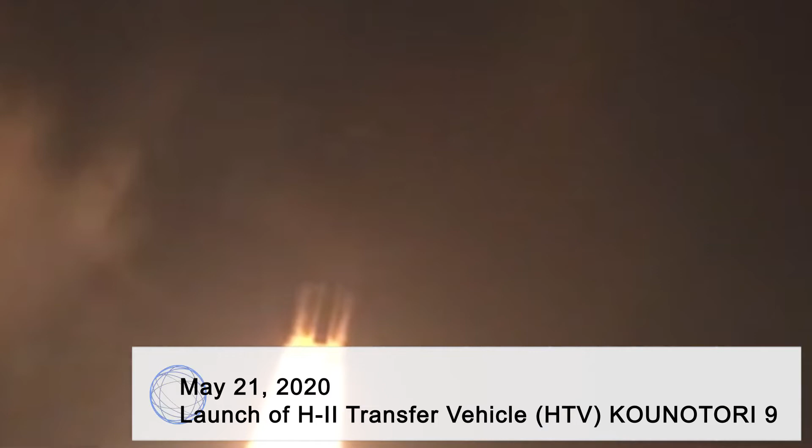On May 21, 2020, the SCEM was loaded onto the H-II transfer vehicle Kounotori 9 and transported to the International Space Station. Astronaut Soichi Noguchi installed SCEM in the Kibo Japanese experiment module.

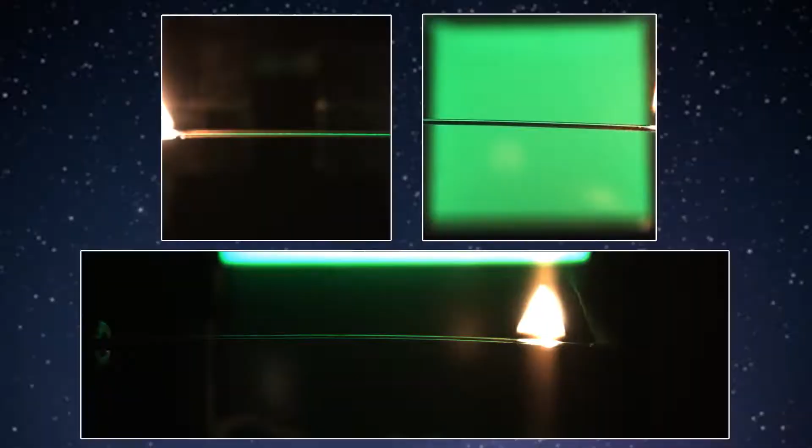With the SCEM, we are able not only to burn a sample material in space, but to use multiple cameras to observe how the flame spreads. Footage from these experiments will give us important data, such as the shape of the flame, how fast the fire spreads to consume sample materials, and how far heat is conducted ahead of the advancing flame.

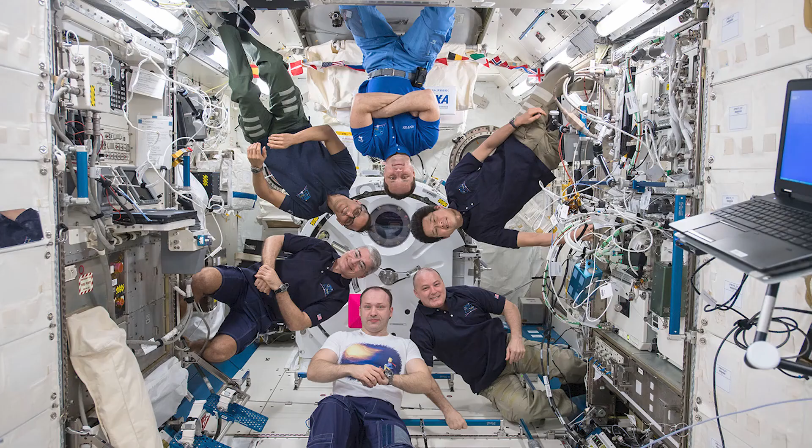The SCEM unit is mounted in the multi-purpose small payload rack, known as the MSPR, which is part of the Kibo experimental module. The larger space, which we call work volume, houses a combustion chamber for experiments, a camera system, a ventilation unit, and a power and communications control unit.

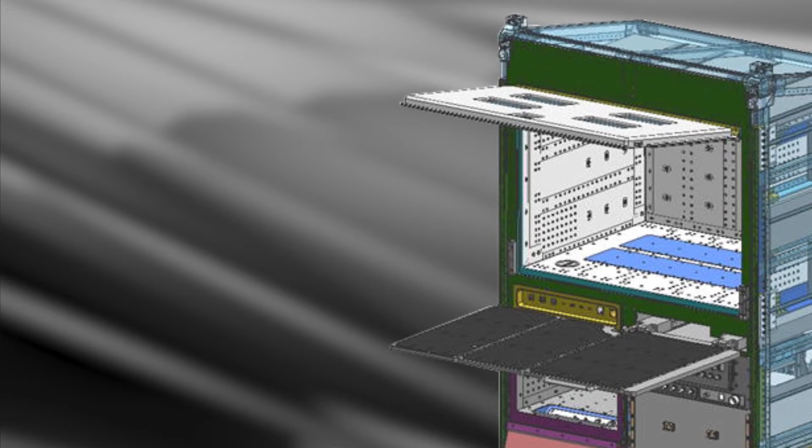In the small experiment area underneath, there is a gas canister filled with a mixture of oxygen and nitrogen, which is essential for combustion experiments.

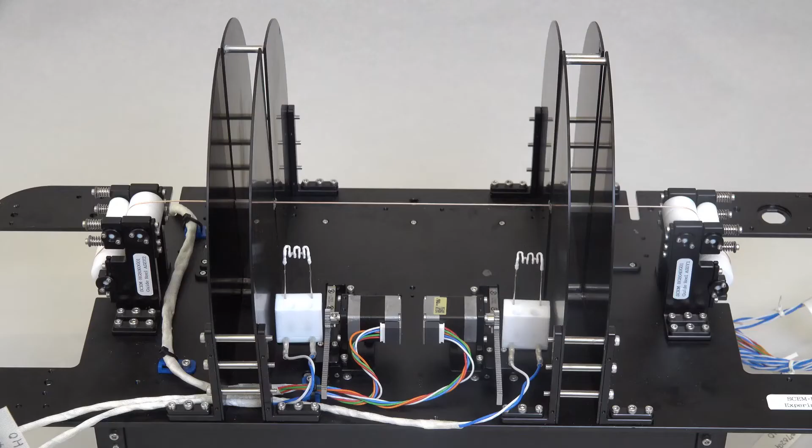There are two types of experiment inserts. The first holds electrical wire samples. The second holds flat samples.

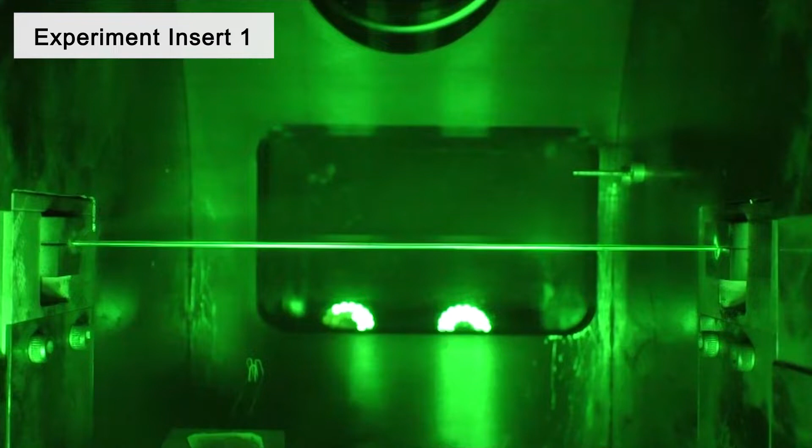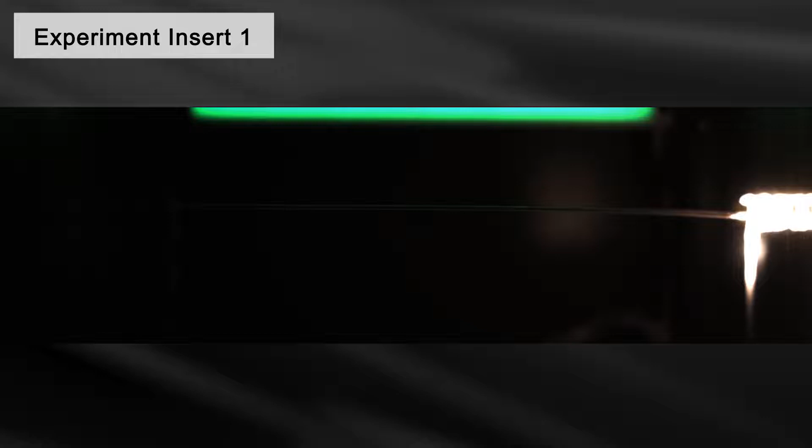Experiment Insert 1 has two types of ignition. One induces a strong electrical current in the wire core, achieving self-ignition. The other ignites the sample using an external heat source.

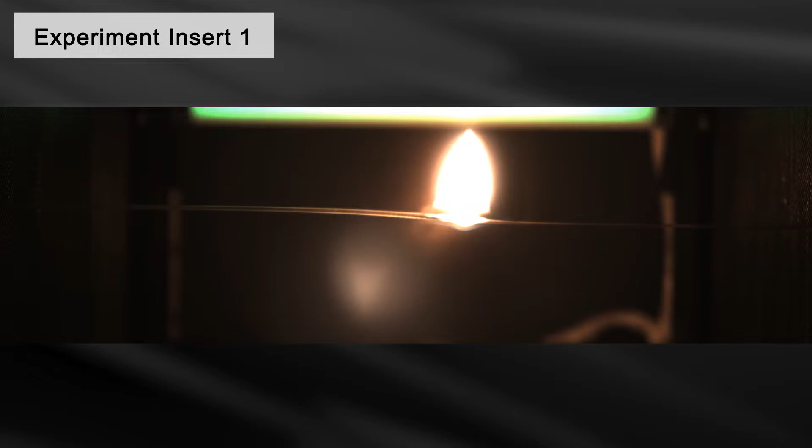This insert allows us to burn an electrical wire that feeds continuously from one reel to another. The unit can accommodate electrical wire samples that are 1.1 millimeters in diameter or even smaller, and up to 81 meters long. An experiment with an electrical wire cannot be recorded properly if the flame moves along the wire at a different speed than the wire is moving from one reel to the other.

In order to keep the fire at the center of the module, the speed of the flame is measured with a visible light camera, and the speed of the wire feed is adjusted accordingly.

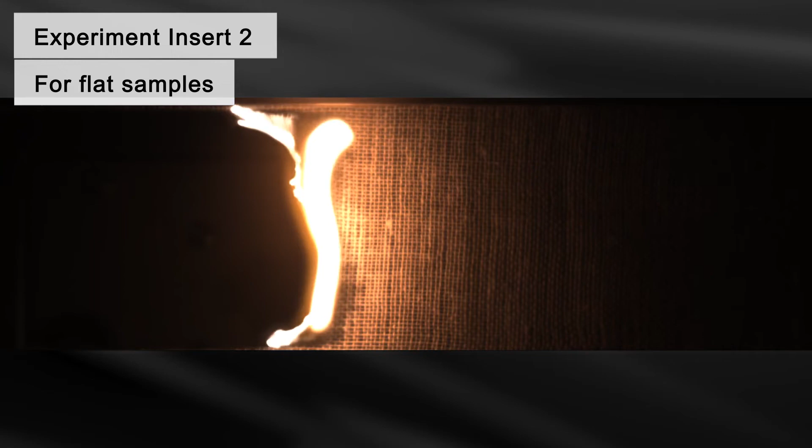Experiment Insert 2 is used for flat samples. Samples are stored in a special cartridge and can be loaded remotely without the help of the crew. When an experiment is finished, the sample is automatically placed in a retrieval cartridge.

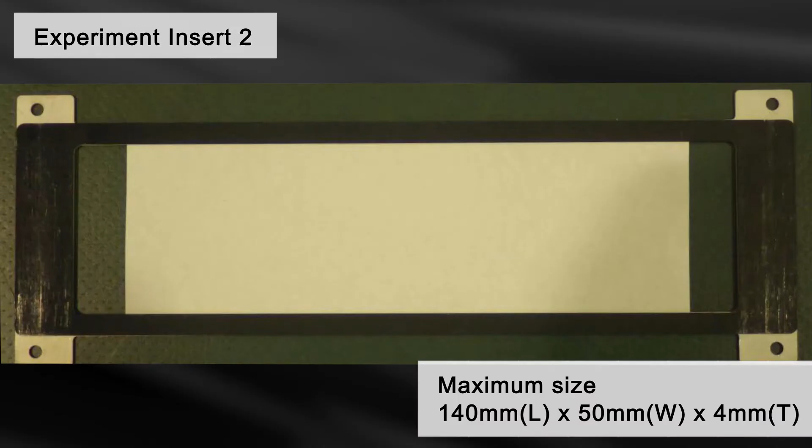In this experiment insert, we can use flat samples up to 140 millimeters long, 50 millimeters wide, and 4 millimeters thick.

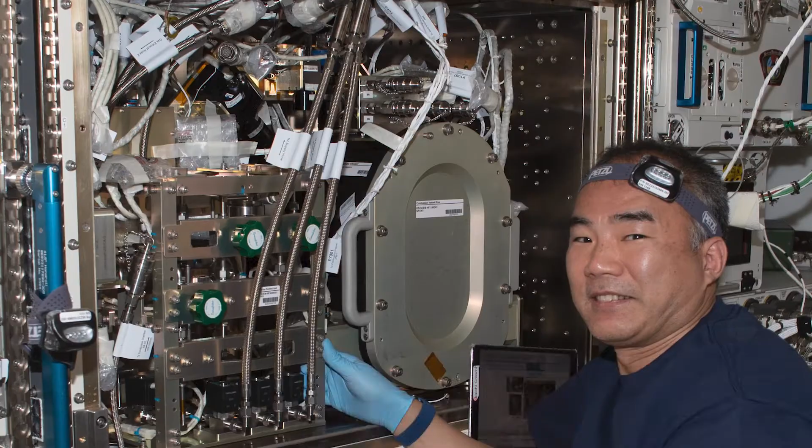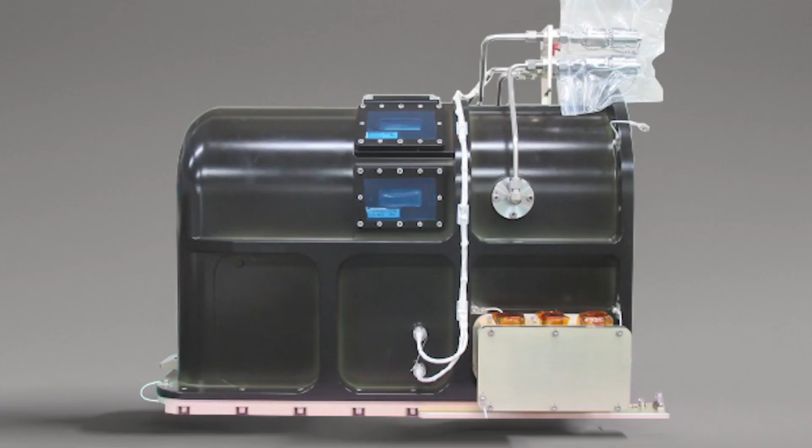What about the environmental conditions inside the SCEM? The oxygen concentration inside the combustion unit can be set to any desired level using nitrogen supplied from Kibo and mixed gas containing 45% oxygen and 55% nitrogen from the gas canister installed in the MSPR. Atmospheric pressure can be set to a maximum of 2 atmospheres.

The combustion chamber has a flow straightening function. Igniting the top of the sample allows data to be obtained under concurrent flow conditions, while igniting the bottom creates countercurrent flow conditions. The built-in fan allows the flow rate to be set anywhere from 0 to 25 centimeters per second.

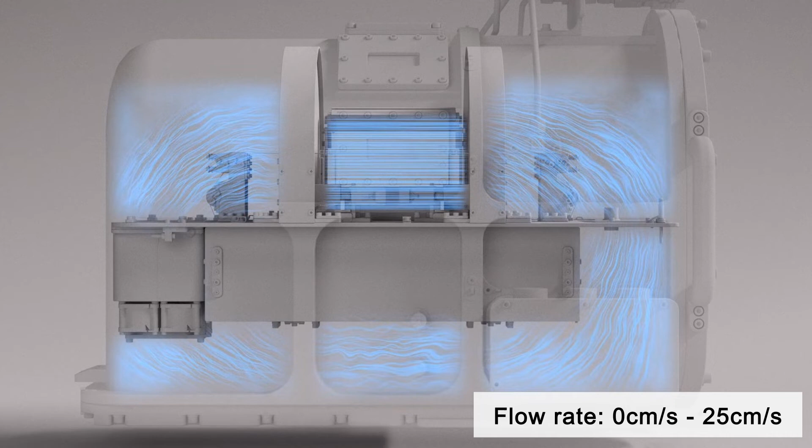The combustion chamber has an air filter that allows the removal of carbon dioxide, water, and soot generated by combustion.

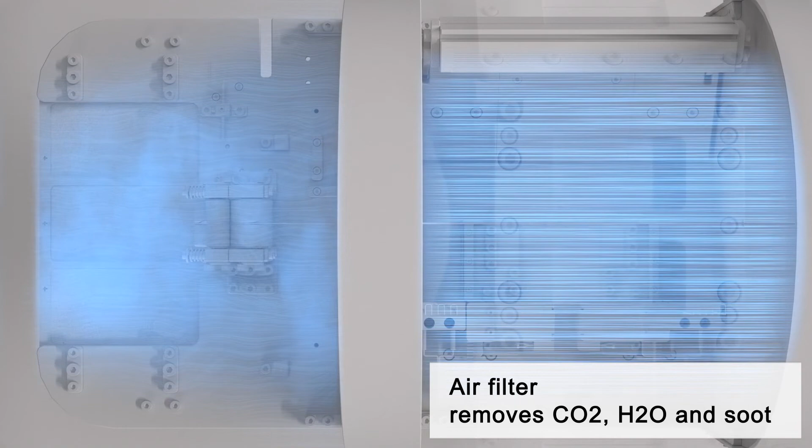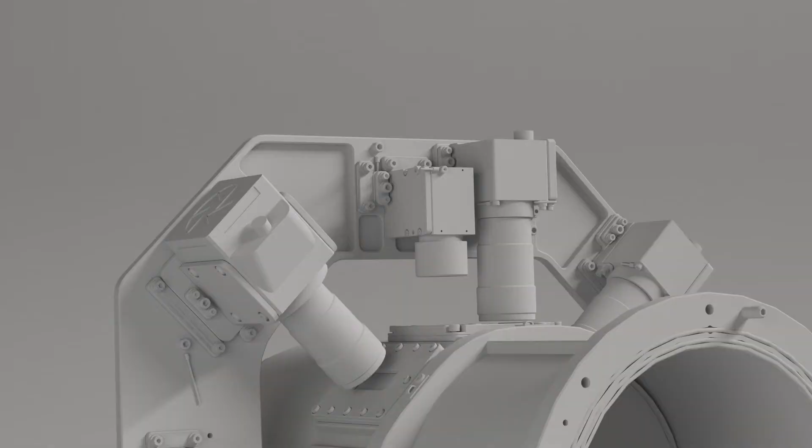The SCEM has 5 cameras that record combustion phenomenon. 3 are visible light cameras, 1 a high-speed camera, and 1 infrared. Each can be individually controlled. Recorded images and videos can be downlinked to the Tsukuba Space Center via remote control from the ground.

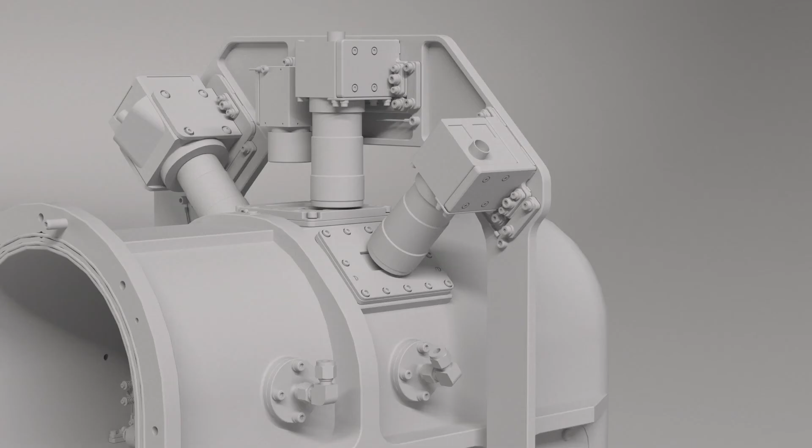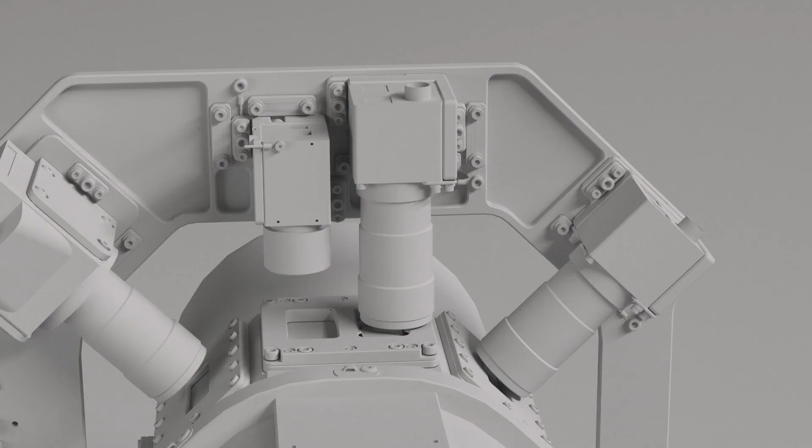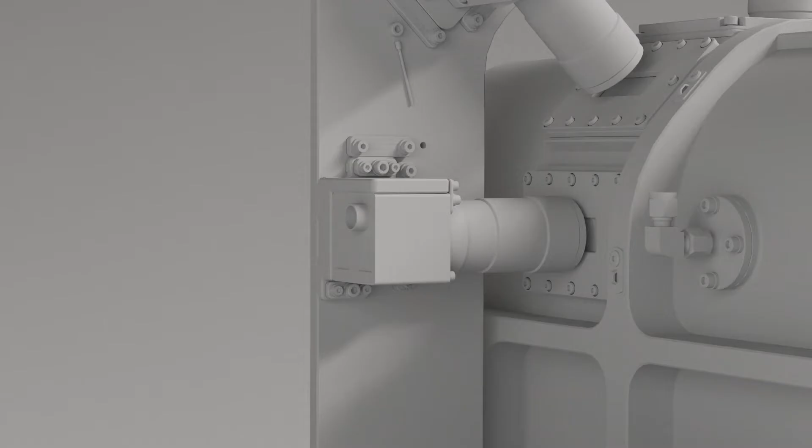Visibility Camera 1 is positioned diagonally above the combustion chamber. Visibility Camera 2 is at the top of the unit, to capture the sample directly from above and to accurately observe the speed of the spreading flame. Visibility Camera 3 is positioned on the side, to capture the sample directly from that angle and to observe the shape and appearance of the flame.

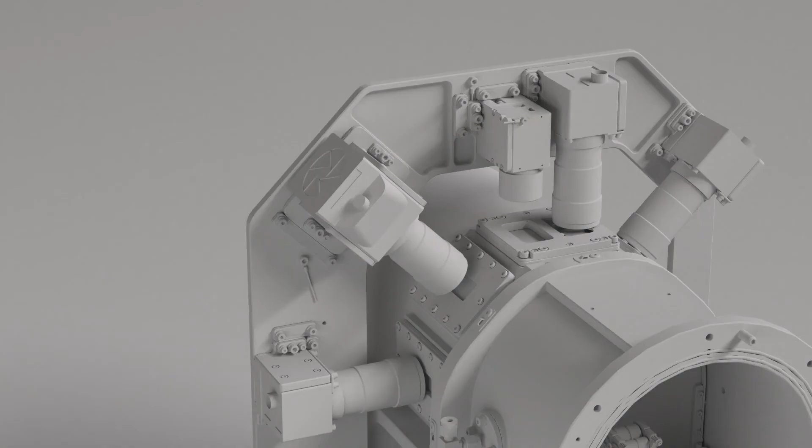The infrared camera is right next to Visibility Camera 2. It captures the fire from directly above and records the temperature of the spreading flame. The infrared camera can measure temperature from 20 to 500 degrees Celsius. It provides still image files at a rate of 30 FPS, converted from raw data files to JPEG.

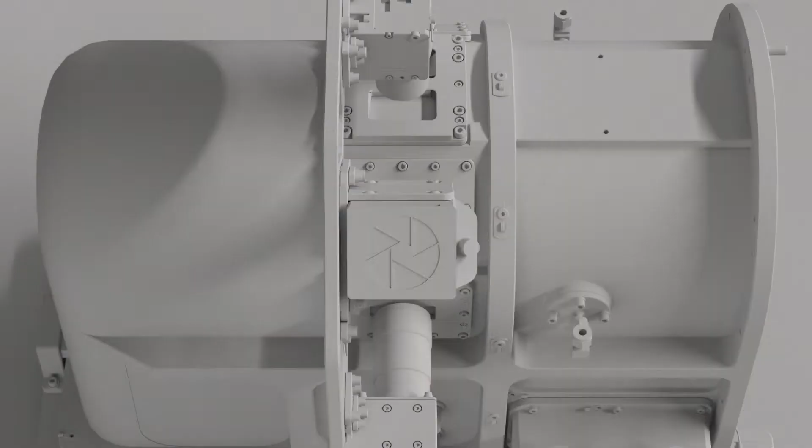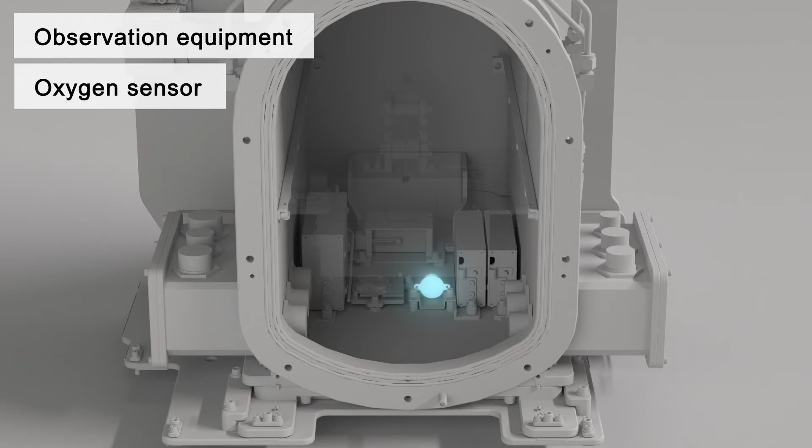The SCEM also has instruments such as highly precise oxygen sensors and sensors that measure CO2, flow rate, and temperature. Oxygen sensors are installed in 2 locations with a measurable range between 0 and 45%.

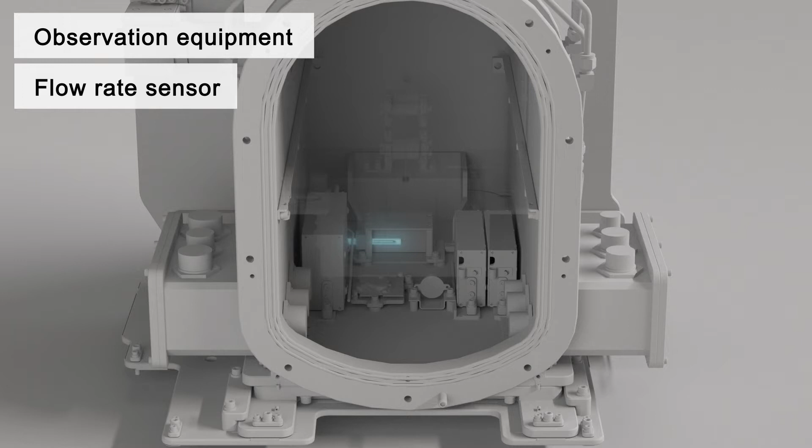There is 1 CO2 sensor with a measurable range of 0 to 3%. This is the flow rate sensor. Its measurable range is 0 to 5,000 centimeters per second. There are 3 temperature sensors with a range of 0 to 100 degrees Celsius.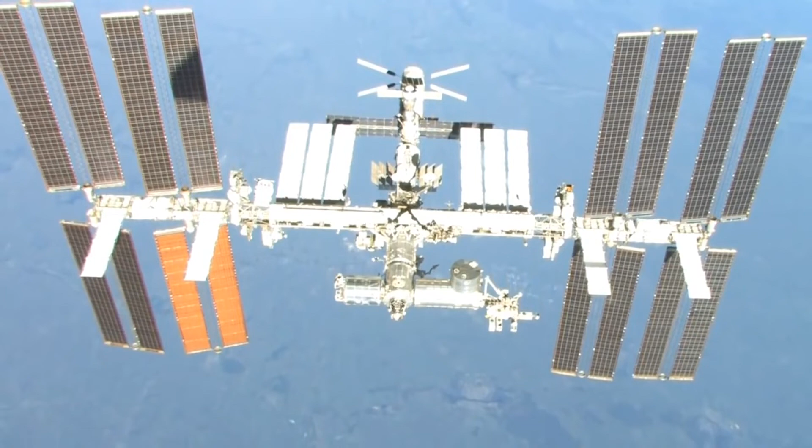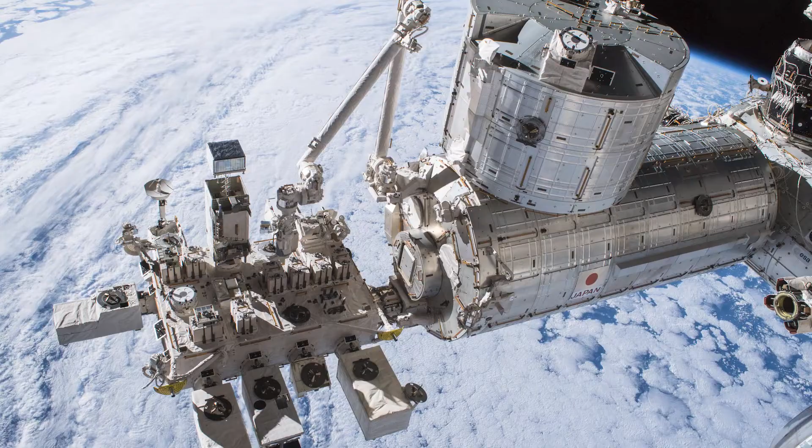Given the importance of space fire safety research, NASA is also conducting solid combustion experiments on the ISS. Compared with NASA's experimental equipment, the SCEM has the following features.

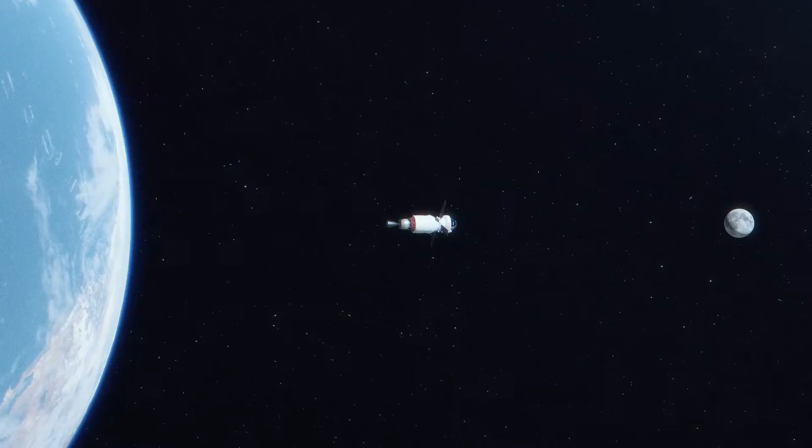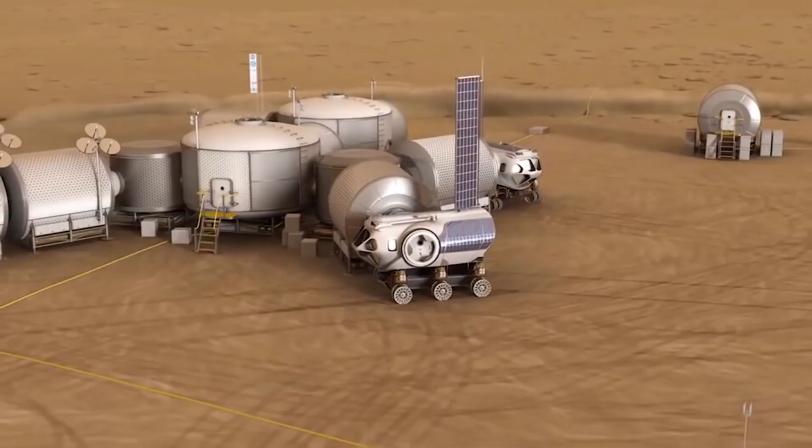First, the automated sample exchange mechanism allows combustion experiments to be performed efficiently and repeatedly, while reducing crew operation time. Second, combustion experiments can be performed under conditions of low pressure and high oxygen concentration. In future manned space expeditions to the Moon and Mars, spacecraft may have low pressure and high oxygen concentration, a different environment from today's space missions. So it's important to study material flammability in such conditions.

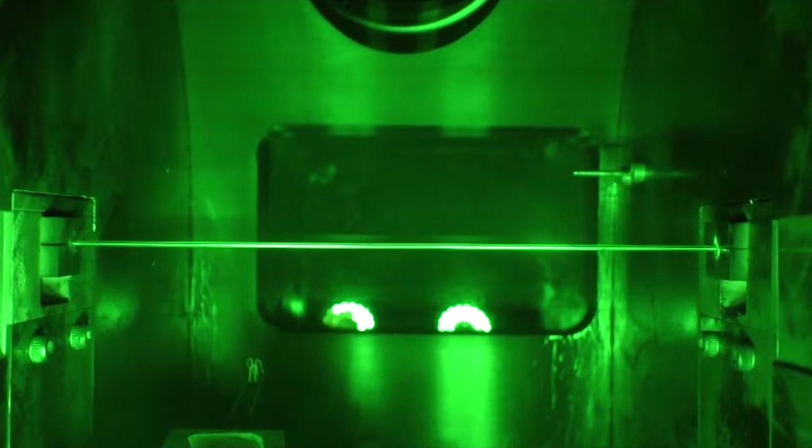In addition, only the SCEM allows studies such as wire sample overcurrent ignition experiments.

The first project to use the SCEM is FLARE, the Flammability Limits at Reduced Gravity Experiment, which was adopted as a priority research category for Kibo in 2012.

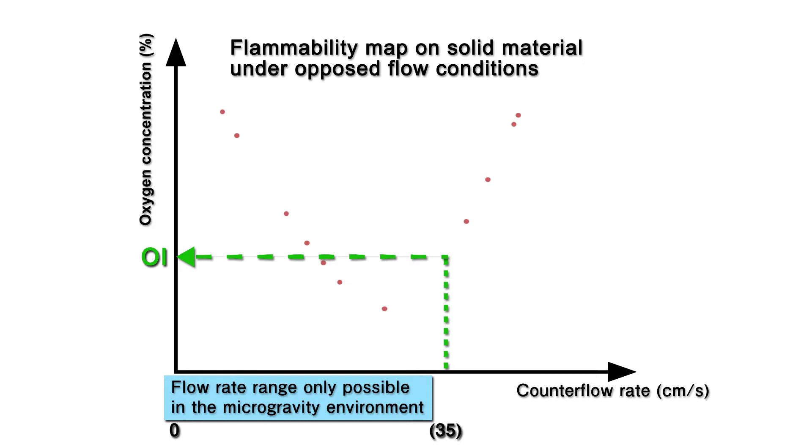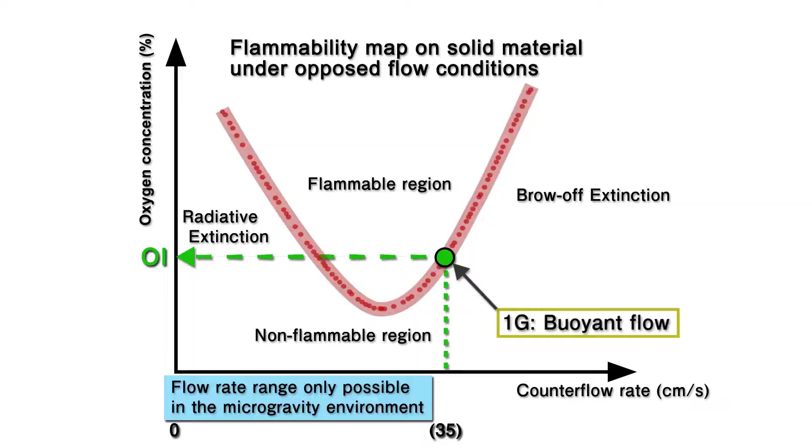With the FLARE project, we will study the flammability limits of individual materials under arbitrary flow rate conditions by running multiple tests with different oxygen concentrations. This research is crucial preparation for human space exploration in the near future. Japan is contributing to our safety and security in space by taking the lead on developing and establishing international evaluation standards.

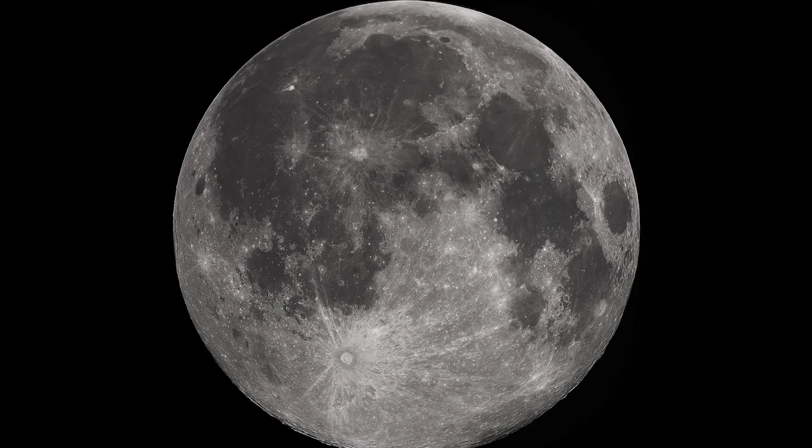Today, the SCEM is being used to conduct combustion experiments in microgravity. In the future, we are considering adding a gravity generator so that we can create conditions of 1/6 or 1/3 gravity and better simulate the conditions on the Moon or Mars.